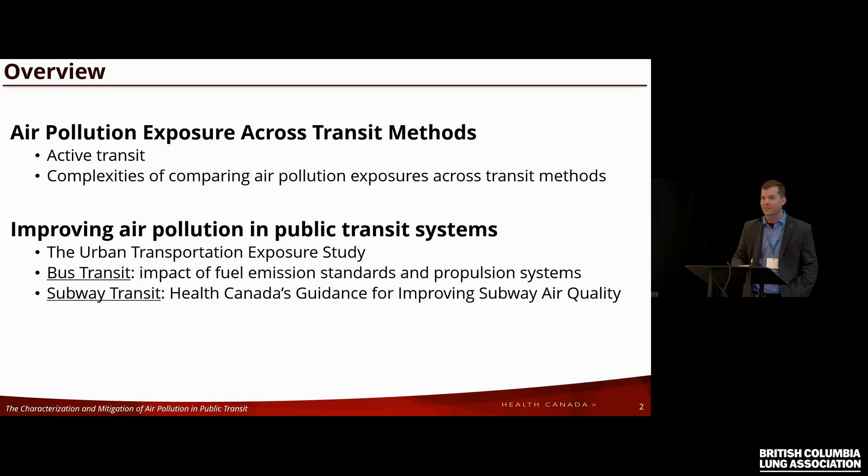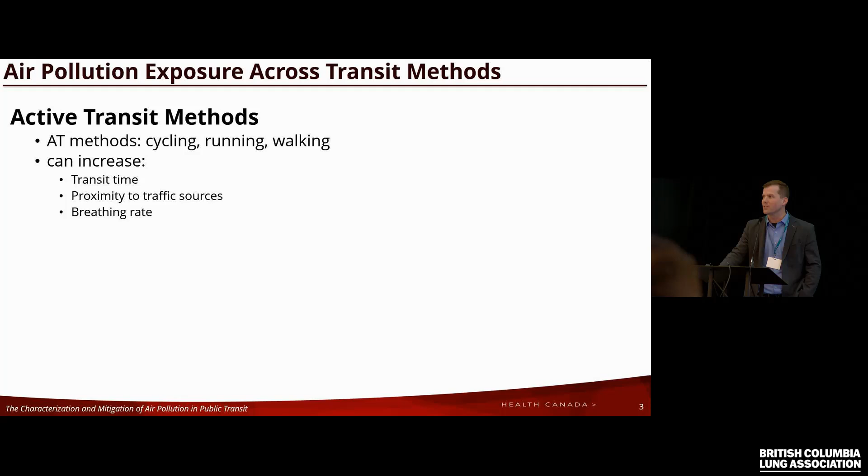With active transit methods, you are increasing the amount of time you're spending in the commuting environment. Typically this environment is in close proximity to traffic sources. You don't have a protective shell like a car cabin or a bus to protect yourself from the air pollution you're being exposed to. There's no filtration, and as well, inherent in this transit method is increased breathing rates, so you're increasing your exposure and your dose.

But there's been a lot of consensus on review articles on this question, and indeed, while you are increasing the dosage of traffic-related air pollution, the health benefits of the physical activity inherent to this method outweigh the increased risks of the increased dose.

But beyond that, comparing air pollution exposure across transit methods is very complicated. Indeed, many publications have been dedicated to this question, and there isn't a lot of consensus. The reason why, the answer lies, the devil's in the details.

There are a lot of factors that determine the amount of air pollution that a transit method has. From one country to another, there could be very different standards of emission for buses, the filtration type used in buses and subways, the design of subway systems, and how much ventilation there is in the system. So when you look across the landscape of publications dedicated to comparing these air pollution levels, there definitely isn't a lot of consensus.

One other interesting factor I've found in my research is looking at how some countries have federal indoor air quality acts where they publish standards for air quality in public indoor spaces like bus stations and subway stations, and they've definitely had an impact on how those systems rank in terms of air quality across the country or across the world.

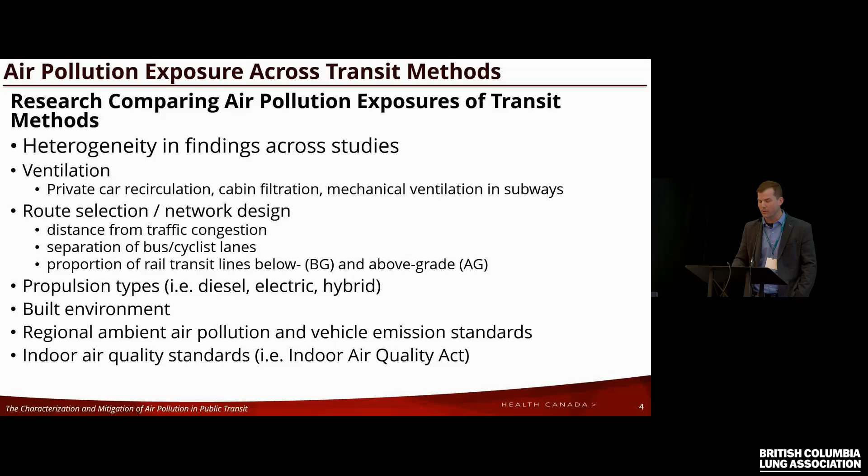The start of our examination into air quality in Canadian transit environments began with the Urban Transportation Exposure Study. We assessed air quality in 3 transit methods, and for each transit method we focused on 3 cities. We did Vancouver, Toronto, and Montreal for private vehicles and rail transit, and we did Vancouver, Toronto, and Ottawa for bus transit.

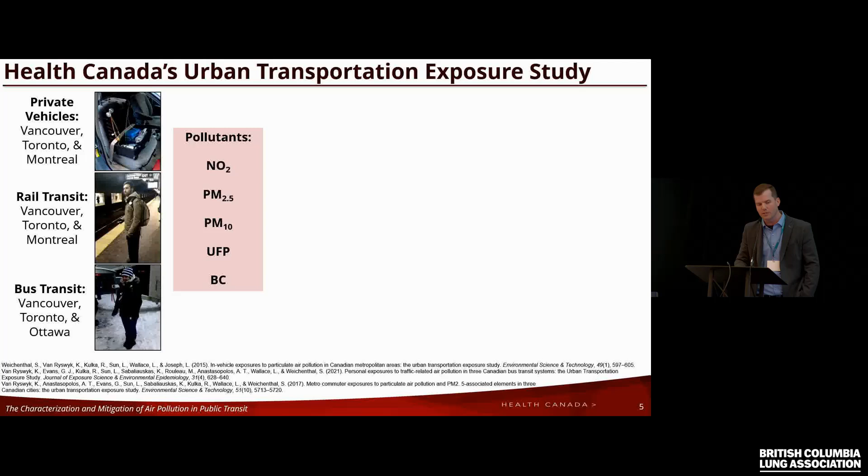We examined a number of pollutants, and our main research objectives were first to do a system-wide characterization. We designed our sampling strategy to involve all of the subway systems, a large cross-section of the bus routes in each city, and a large proportion of the city's road networks. We also wanted to identify determinants of these exposures. The idea is that based on this, we could generate future research questions to target mitigative strategies to improve air quality, particularly in public transit. Finally, we wanted to know how much daily air pollution exposure a person could get from their time spent in the commuting environment.

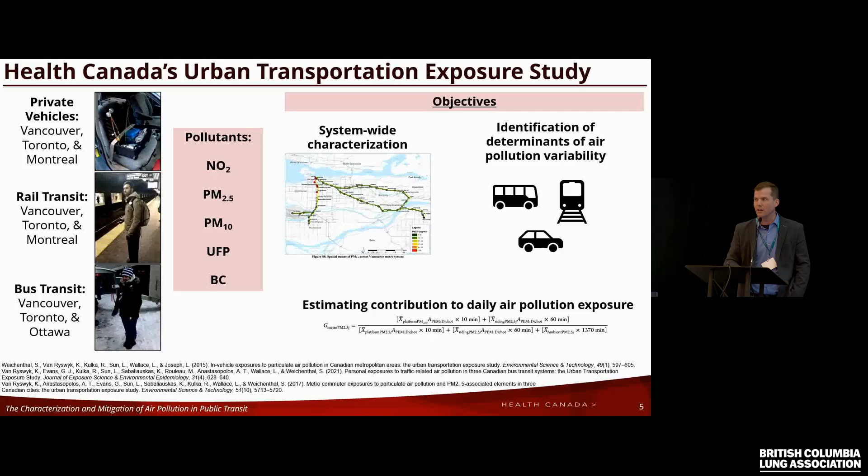First, I'll talk about one of the questions we asked in the bus transit portion of our study. We conducted an analysis where we wanted to know how much a bus's own propulsion system impacted the exposure of its patrons.

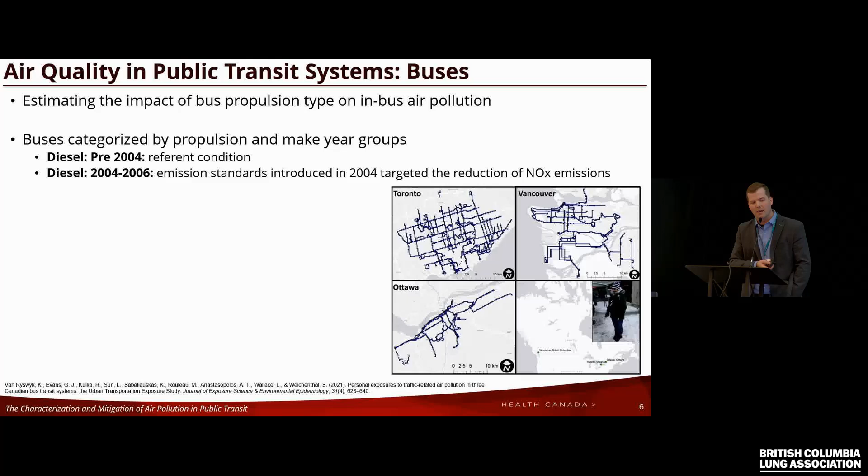For all of the bus commuting we conducted in Toronto, Vancouver, and Ottawa, we categorized each bus as pre-2004 diesel, which was our reference condition, since 2004 saw the introduction of emission standards that we thought would impact air quality inside the buses.

Then there were our 2004-2006 make years, and our post-2007 bus make years. This is on account of the 2007 introduction of technologies which would yield a tenfold improvement in emission standards, having to do with diesel particulate filters and selective catalytic reduction systems.

Each bus fleet also had a portion of hybrid diesel electric, and Vancouver was unique in that it was the only one with an electric bus propulsion system—these are the trolley buses we see from time to time driving around the city.

Our results showed there was indeed an association between a bus's propulsion system and its own air quality. We found that the 2007 and further diesel bus class had lower PM2.5, black carbon, and ultrafine particles in all three cities, with the exception of ultrafine particles in Vancouver—so 8 of 9 combinations.

This evidence is interesting because while these emission standards are designed to improve ambient air quality, there was indeed a benefit to bus transit patrons as well—it reduced their exposure while they were transiting.

It also suggests that buses' own air pollution is sourced from their own exhaust. Typically the tailpipes are in the back, out the roof, but still there's infiltration happening of its own exhaust into its own bus system.

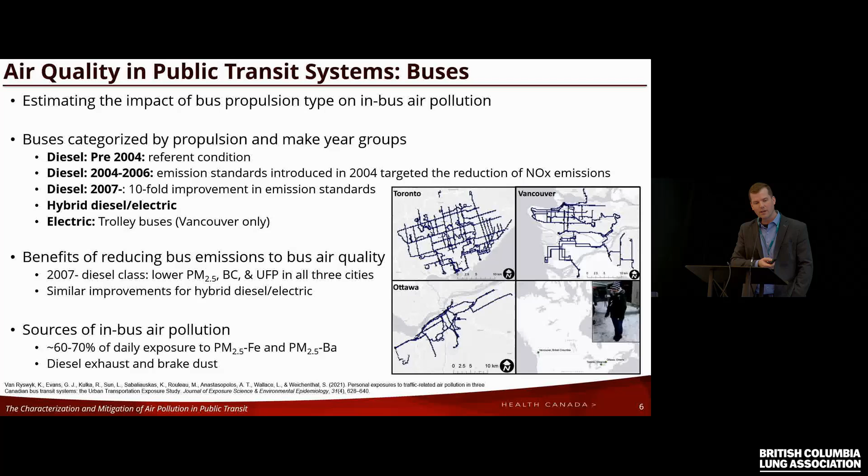Moving forward, what is the future of air pollution exposure going to look like in bus transit systems in Canada? We're at the beginning of a huge influx of electric propulsion buses in a number of public transit authorities across the country. This is definitely going to change the landscape.

A huge elimination of the amount of diesel exhaust exposure, but also potentially of brake dust on account of these buses having regenerative braking systems.

I would love it if someone here knew at what kilometers per hour regenerative braking quits and friction braking kicks in. Because in subways, it's 5 kilometers per hour, but I don't know what it is for buses, and nobody else does here. I should have learned that—that would have been a good part of the presentation.

But if it's like subways, at 5 kilometers per hour it switches from regenerative to friction braking, that's going to be a huge decrease in the amount of brake dust being produced.

A lot of this influx of electric propulsion buses is being pushed by the Zero Emission Transit Fund introduced by Infrastructure Canada, providing subsidies for the purchase of zero emission buses, or ZEBs as they like to call them. I've got a list of public transit authorities that have made plans to purchase these types of buses and replace their retiring diesels with electric buses.

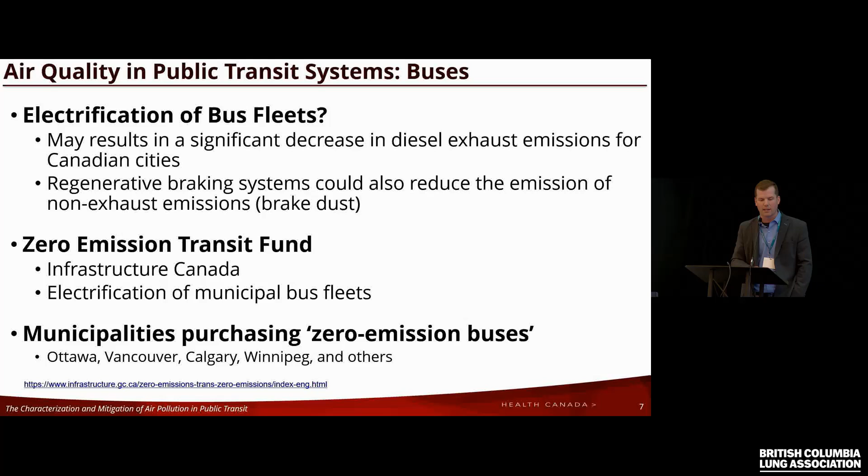For Montreal, this is PM2.5—you can see relatively similar exposures between the private vehicle and the subway system. Very different in Toronto, where we see significantly higher levels of PM2.5 for subways relative to buses and private cars.

But there's also an extra element of the subway systems here: the below grade and the above grade. So above grade subways in Toronto, that's about 20% of the system, where 80% is below grade. And in Vancouver, it's kind of the opposite. But we see this same trend where we have significantly higher PM 2.5 levels in the below grade portions of the subway systems.

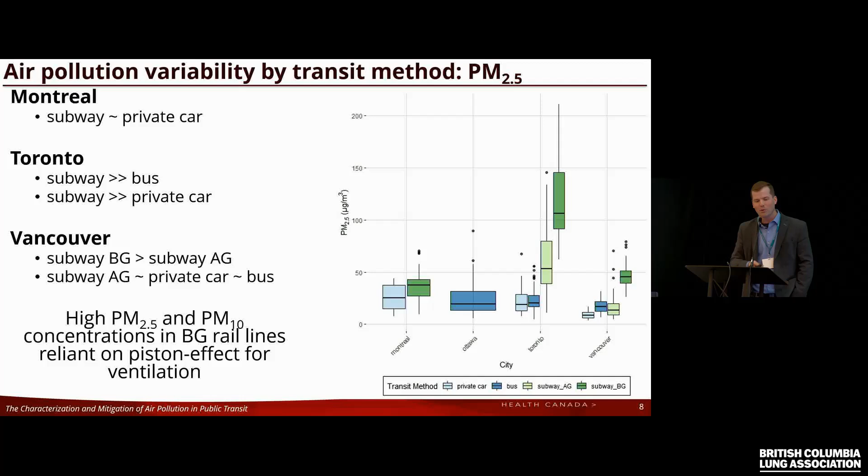And if you'll take note of the y-axis, these are high levels of PM 2.5 in these environments. And this was the piece of evidence that led us to the conclusion that there is a high concentration of PM 2.5 and PM 10 in the below grade rail lines in the world, particularly the ones that are unventilated. Because as you can see, the Montreal subway PM 2.5 levels are on par with other transit systems. This is part of the complexity I was talking about at the beginning of my presentation, but we'll talk about the difference later on.

But our next study, also in this study, we wanted to estimate the proportion of daily exposure that came from commuting. For subways, for Toronto, it's 21.2% of daily PM 2.5 coming from subway commuting. So that's 4.9% of your day for these 500,000 commuters. And the 4.9% comes from the Canadian Human Activity Pattern Survey. But we estimated basically a fifth of daily PM 2.5 exposure coming from subway commuting for Toronto.

Much less for Montreal and Vancouver. Montreal owing to its significantly lower PM 2.5, which I'll discuss in a minute, and Vancouver being predominantly above grade. But also a very different profile of elemental content of a person's PM 2.5.

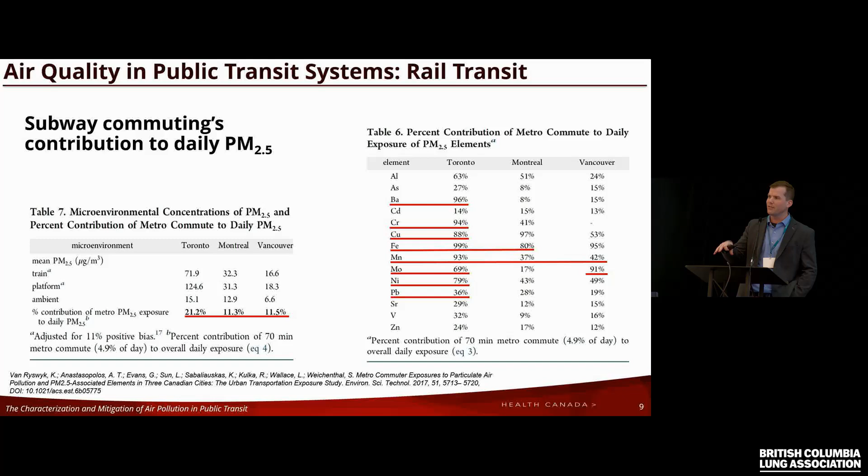It's a bit of an interesting anecdote. Around 1999, there were some researchers from Research Triangle Park who wanted to take a look at the personal PM 2.5 chemical composition for Torontonians. They recruited 992 people and sampled them for 3 days, and they wanted to know what their manganese level was like, because they were concerned with the MMT additive to fuel that was allowed in Canada. But there was this subset of participants with really, really high levels of manganese, and it took them a while to figure out where that was coming from, and indeed they were subway commuters.

But all in all, our findings of the first study were that subway commuting could contribute significantly to daily exposure and produce a unique profile of PM 2.5, which may be a concern.

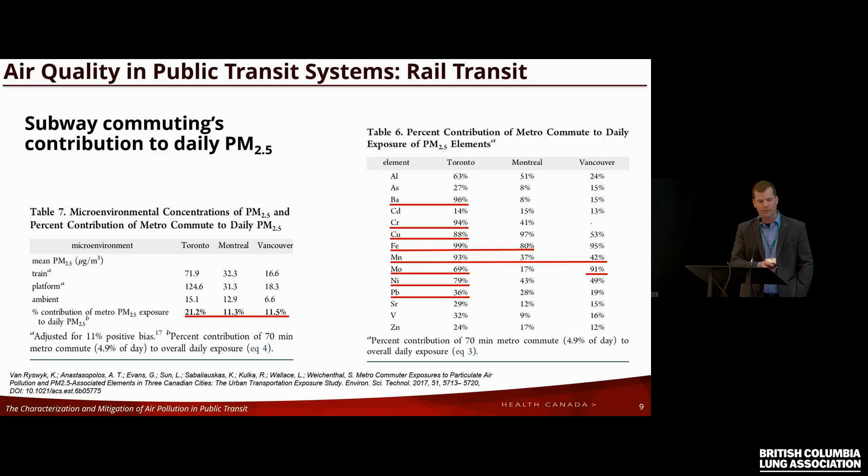Now Montreal, why so low? Continual mechanical ventilation—the heat buildup in the Montreal system is quite high, and it needs to be regulated, or it would be impossible for people to take the subway because it would be too hot. This is also the case for a lot of other systems in warmer climates, like the Barcelona subway system, and many others. They need continual ventilation to maintain thermal comfort levels, and the benefit of that very expensive measure is that the air quality of those systems is pretty good.

I had somebody from the municipal government in Montreal call me once and ask about my research, because they wanted to institute or push for monitoring in the system, and I said the air quality in the Montreal system is amazing. I'm sorry—let me know if you want to do something in below grade unventilated subway environments.

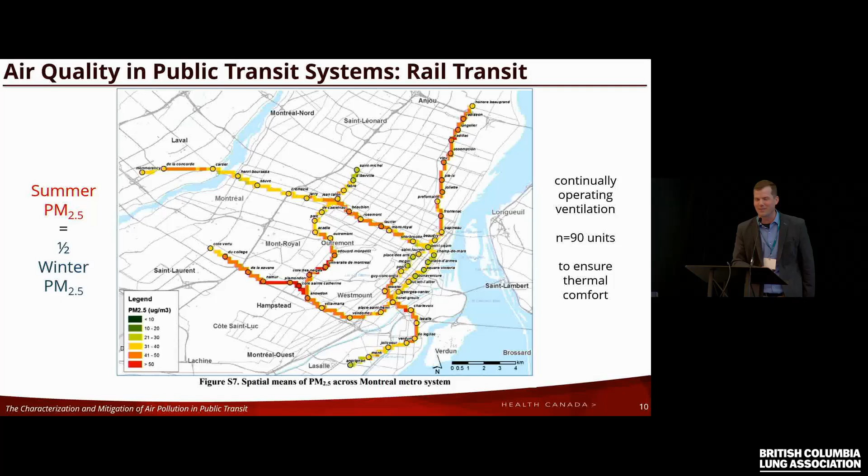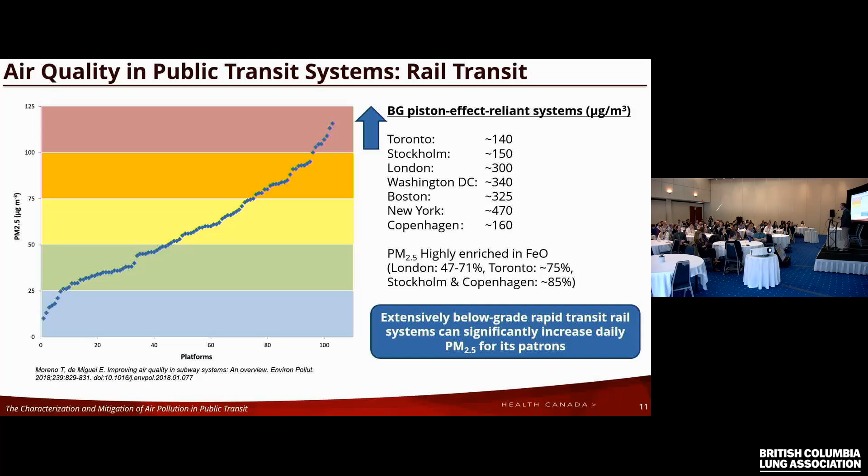This is a finding that's coming out with me and other researchers, published in papers showing that extensively below-grade rapid transit rail systems can significantly increase the daily PM2.5 exposures of its patrons, which number in the millions. One publication based on the London Underground estimated that every 1 hour in the subway system would increase a person's daily PM2.5 by 12 micrograms per cubic meter, a clinically significant level. But what is the composition, Matt?

Moving forward, we went back to Toronto and did some sampling at 11 platforms throughout the system. We wanted to know what interventions would impact the level of PM2.5. Our results: vacuuming didn't work, even though they had introduced a track bed vacuum car. It didn't remove any of the PM2.5.

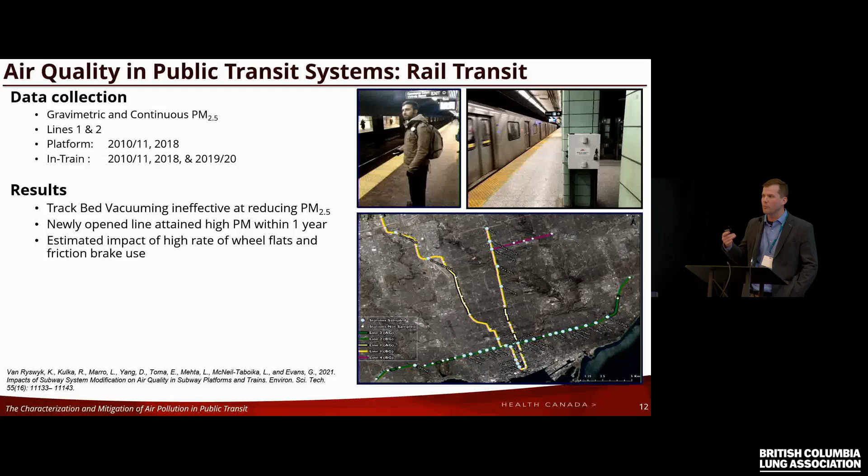The newly opened section in the northwest of line 1, top left of the image, we sampled within a year of it being introduced. It had levels typical of stations that were 60 years old, in under a year. This points towards freshly emitted PM being the predominant form.

On line 2, the green line, levels increased by 49% line-wide. We found this had to do with an issue with the signaling systems for braking. Trains use regenerative braking and switch to friction at 5 kilometers per hour, unless they've passed a certain marker, in which case the friction brakes engage. So we had a lot more brake dust and steel dust on that line when we were down there, which is also interesting.

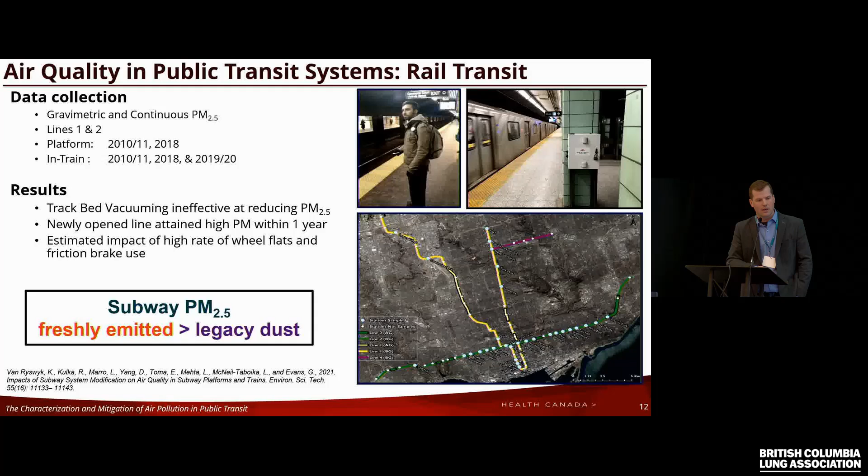Looking at the composition, we're seeing 75% iron oxides of all the PM2.5 in line 1 and line 2 in the Toronto subway system. And there are similar elemental profiles of other extensively below-grade systems that are unventilated.

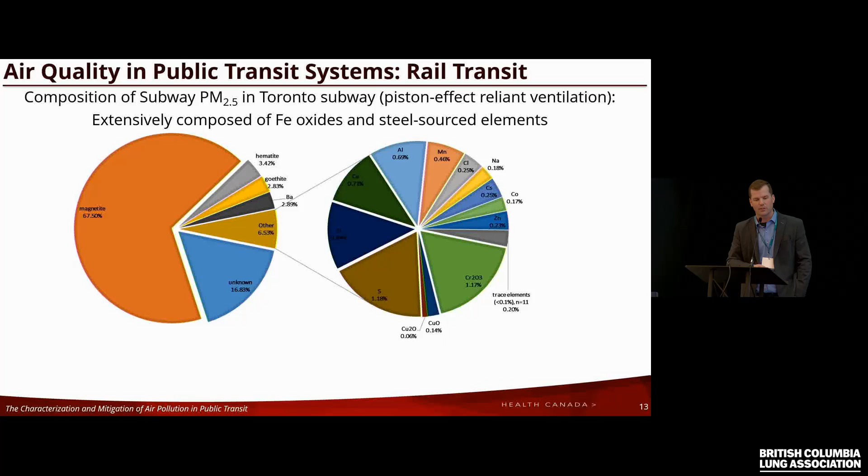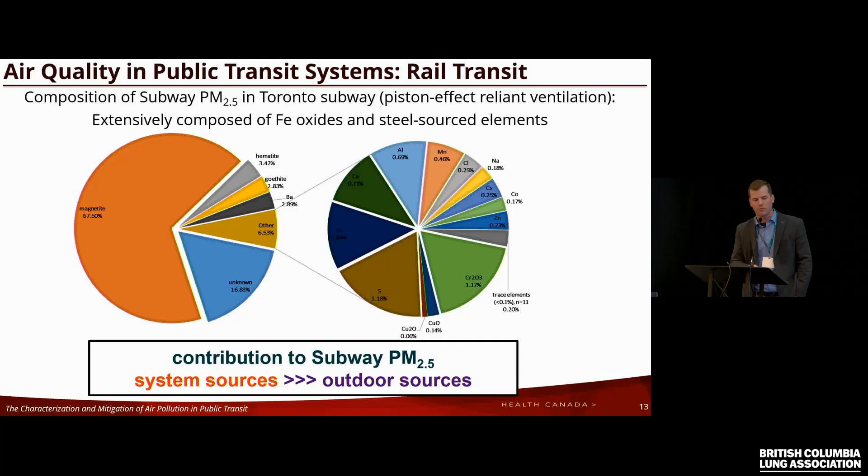But what does this mean for health effects? A high content of fine fraction iron oxides and steel source elements. Well, one: sources - most of the PM in the system is from the system itself, so it can be controlled and mitigated, and we need to look into methods to do that. But what it means for health effects is a whole other research question that needs to be answered.

I did hear somebody today say something along the lines of, it doesn't matter what it's made of, it's all bad. No? All right.

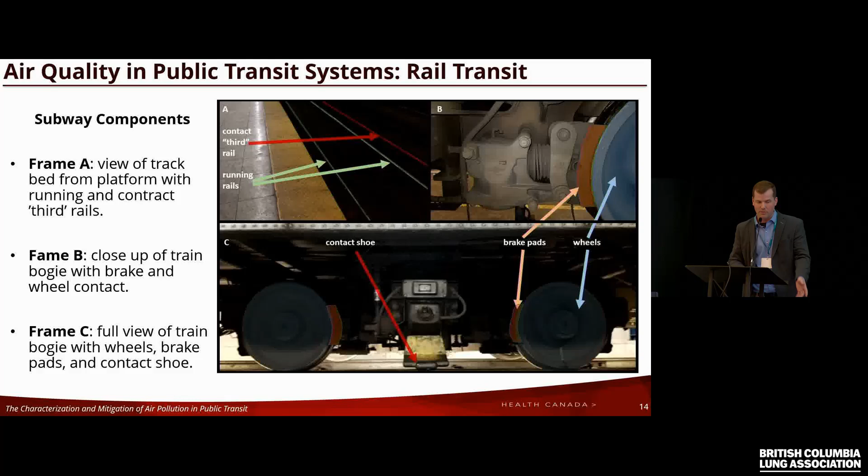The main components that produce the PM in the subway system - frame A, top left - you've got your rails, your third rail electrification system shown in red, and the main rails. You also have brake pads, as well as the steel wheels themselves. So about 5 different sources we've been looking into in the Toronto system.

We've conducted chemical mass balance modeling to try and understand the apportionment between two sources. One, the Fe-dominated components - the rails, the contact shoes, and the wheels - over 94% iron, basically one big source of iron. And then the brake shoes, which have a higher content of barium and a couple of other elemental species that make them distinct from the iron-dominated sources.

Line 1, at the top, shows nice normal operation with friction brakes engaging at 5 kilometers per hour, a very low proportion of PM coming from brake shoes, most coming from the steel components. But on line 2, there was that issue with a high rate of friction brake use and wheel flats - when you have a steel wheel and get a flat section from continual rubbing on the rail, it needs to be trued and fixed. There was a huge rate of this happening in 2018 when we were in the system. As you can see, because of the friction brake use, there was a lot more PM, and a lot more from brakes.

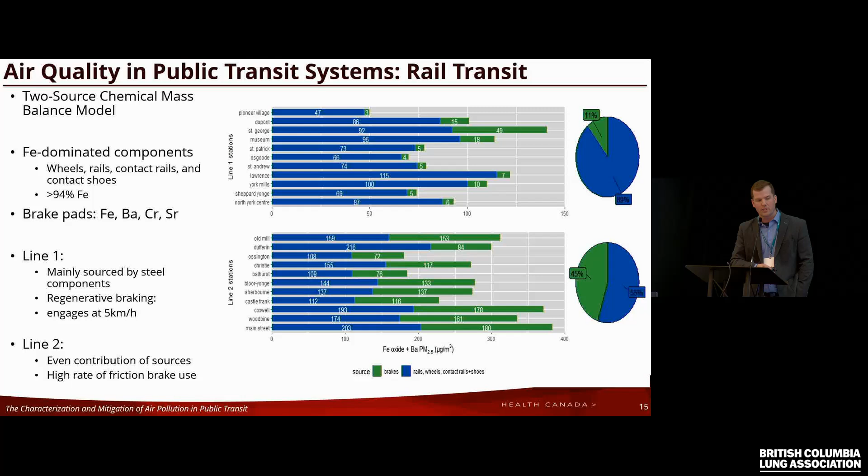So that's where we stand. The other activity we've been doing is publishing a guidance document on managing air quality in subway systems. This was published a year ago, based on a massive literature review we conducted, and we had 4 main things that we advised to be done to improve air quality in below-grade subway systems.

First, forced ventilation systems - that's a very expensive measure. Other systems do it because they absolutely have to for thermal comfort, but could systems that don't need it for thermal comfort possibly consider it? Next, in-train filtration, so higher grade MERV filtration systems.

That's rather than focusing filtration efforts on platforms where patrons spend less of their time and there's a far greater airspace to manage there. So in-train filtration, monitoring subway air quality, is an excellent idea throughout a system.

The high rate of PM production in Line 2 in Toronto could have been seen right away, it's such a sharp increase. And indeed, when they fixed the issue and we went and did sampling again, it all came down to typical Line 1 levels very, very quickly. So they could get ahead of problems having to do with mechanical issues that cause PM and are very expensive, reducing subway PM emissions.

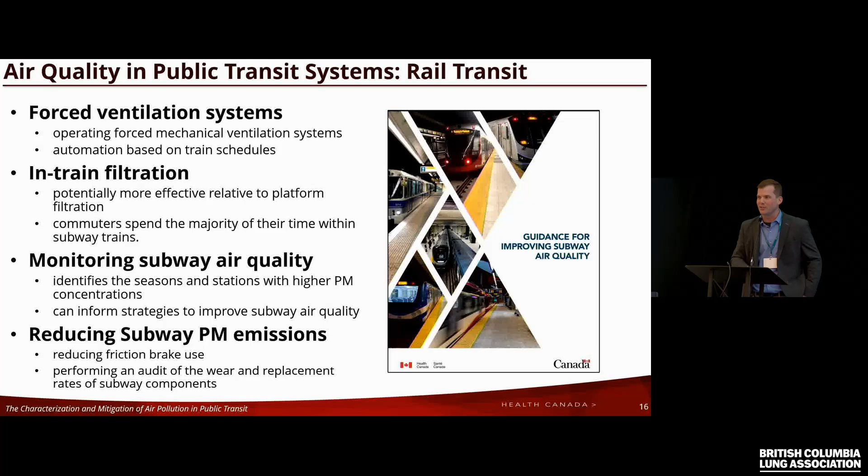So how much does the rail weigh before it's used? How much does it weigh when you have to replace it? Same thing for the wheels, same for the brake shoes. Basically the kind of analysis that we would love to do, so they can isolate which of the steel-dominated components is producing the most PM and then explore mitigative efforts there.

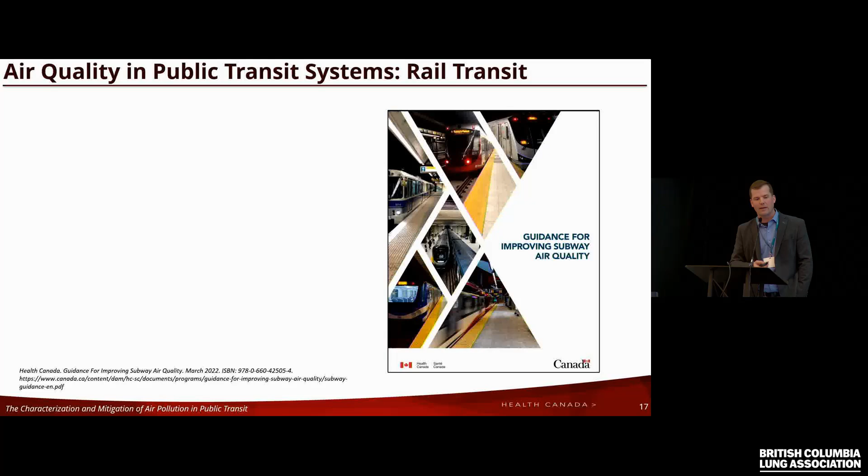The things we said that might not be a great idea: one, platform screen doors. Definitely install them for public safety, absolutely. But they really do concentrate the PM emission inside the tunnel so it more readily infiltrates into the trains.

I was able to work with some researchers from Copenhagen University at the end of last year on one of their publications of the Copenhagen subway system. Very interesting situation: complete loop, completely below grade, complete platform screen doors, and it's one of the few systems in the world where the in-train levels are higher than the platform levels.

And also some longitudinal research that was done in the Seoul Metropolitan Subway System. They had data before and after the complete installation of PSDs throughout the system, and indeed it increased in-train levels. Vacuuming and washing, based on our research and research done elsewhere, doesn't seem to be very effective at improving air quality.

I don't know where it's going. I think it's all going into the coarse mode and settling, but the PM is being generated on a daily basis. If you were to sweep away all of the PM, it would just come back in a short time frame, and that's what we see. In our study, Copenhagen and Stockholm, with a newly opened independent below-grade section, PM gets really high very fast.

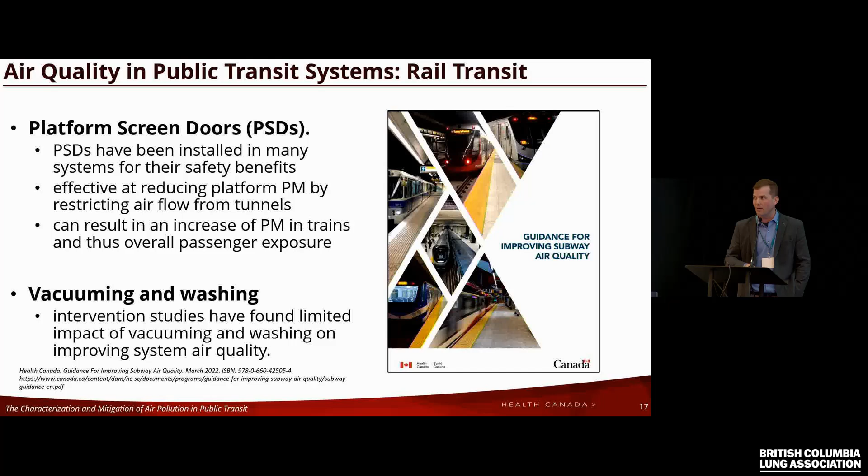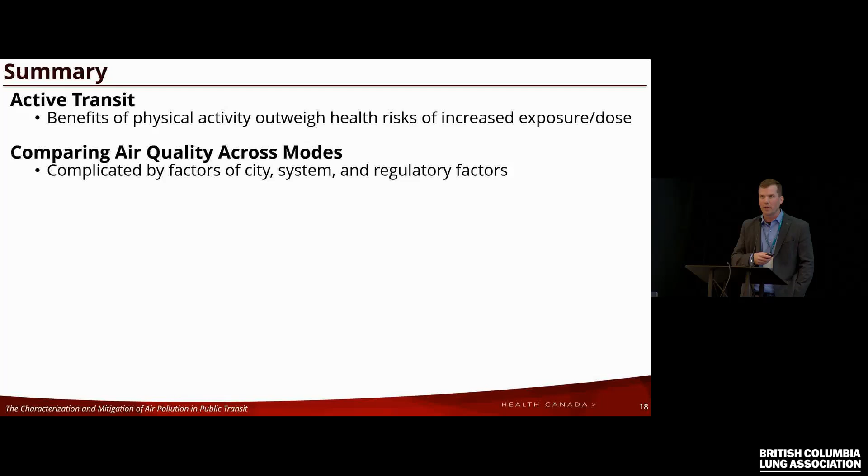So in summary, active transit: in terms of the comparison of modes, the benefits of physical activity outweigh health risks of increased exposure. Comparisons across modes are very, very complicated beyond that. Improving air quality in public transit, reducing emission of traffic-related air pollution, is definitely key for all modes.

The electrification of bus fleets that's being planned in the future is definitely going to change the landscape of air quality in buses. And lastly, air pollution in below-grade rail transit systems seems to be a particular unique problem of its own, but solutions are possible.

We have increasing infrastructure of below-grade subway systems in many cities in Canada. And if indeed mechanical ventilation systems, which do exist because they're mandated by Transport Canada, can be utilized to maintain some threshold level, that would be pretty great.

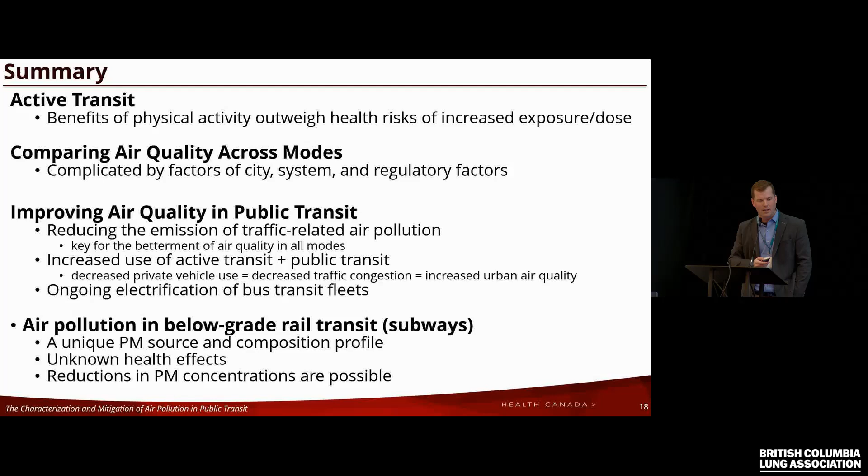And I think our best knowledge translation approach is an international one. There's a lot of links between the public transit authorities across the globe, they share CEOs constantly. And I think that if we can get their ear on this potential problem, on this real problem, and the potential solutions to it, maybe we would be able to, because each of us has a relationship with the public transit authority, one or two of them, and they're very busy.

They're concerned with public perception very, very much, and that makes a lot of sense. They get a lot of flack from the public about how their system's being managed. It's very hard for them to think long term, especially about air quality.

There are no standards in this environment for Canada, for many countries, and so there's no force. All that exists are occupational ones, and they're a milligram per cubic meter. There's no occupational standard for PM 2.5. So there's no reason for them to do what I'm suggesting, which many are suggesting: the very, very expensive intervention of using mechanical ventilation.